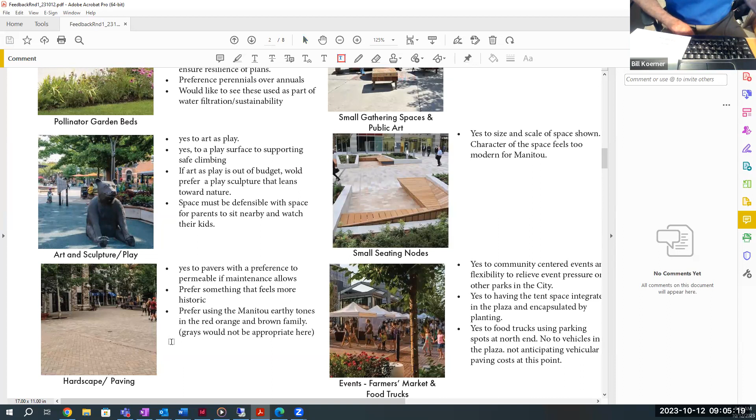Just a piece of information — you might look at the Winter Blend mix they have at Home Depot, a mix of colors that comes out really nice. I used it for my backyard. Winter blend, yeah, I think that's what they call it.

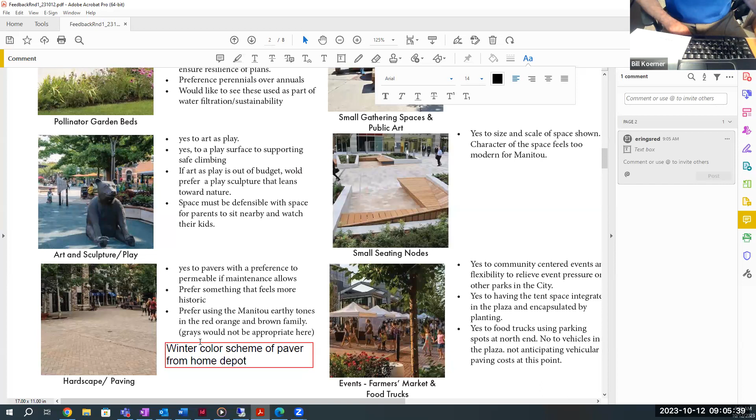I think any of those would be appropriate. Aaron, is there any possibility — that's not the right word — opportunity or appropriateness to use decking instead?

I think it's something that could be explored. I'd say it could come at an additional cost, both in installation and life cycle cost, just in terms of staining and upkeep. If we went with a hardwood, it's more expensive to install and hasn't been as resilient to the elements in my experience.

I was thinking the opposite, that it might be less expensive, but I don't really know. I like the paving better — I was just looking at costs and permeability.

It's something we can ask them to explore as we're looking at materials. In my experience, it's not necessarily a lower cost per square footage for something comparable in maintenance level and long-term life cycle cost. I'll write that note down though.

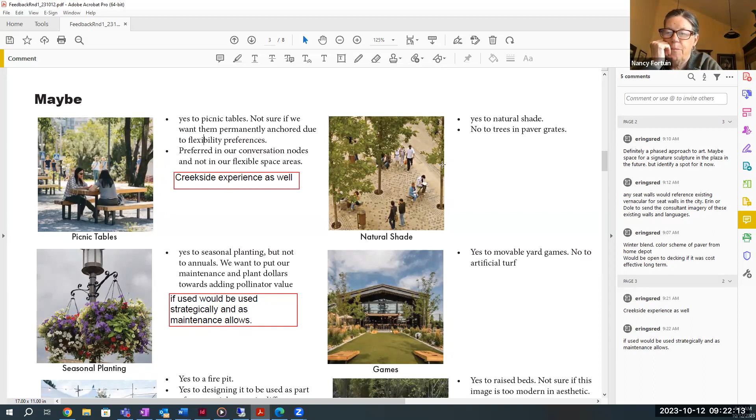Awesome, any other comments or thoughts on these ones?

Okay, so fire pit, and this isn't one that's been identified for discussion in terms of different comments. I need to adjust, I didn't adjust this text specifically after I'd gotten some of the comments, so I apologize. So maybe to a fire pit.

I think what we heard at the community meeting was the potential for fire to be part of some of the different cultures and religions, in terms of their ceremonies. So thinking of this as an event space that's welcoming and inclusive, having an option where fire could be used safely for their different ceremonies could be helpful in terms of being inclusive to the different communities reflected in Manitou's residents. If it was a gas fire, it would have to have controlled use.

It would be turned on for events or turned off, and that would be in a secure location where it would be turned on and off. If there is a fireplace there full time, it would be something sculptural, so it would still be visually appealing when it was off.

Another thought I had after last night, thinking about this some more, was with some of these conversation nodes we're setting up, you could always set them up where a fire pit could be located in them if there was a group renting out the space and needed it for a ceremony, but it might not be a permanent thing there. But that's why the conversation is happening around the fire pit, from that community input as it related to some of the different spiritual ceremonies that might require a designated space for that.

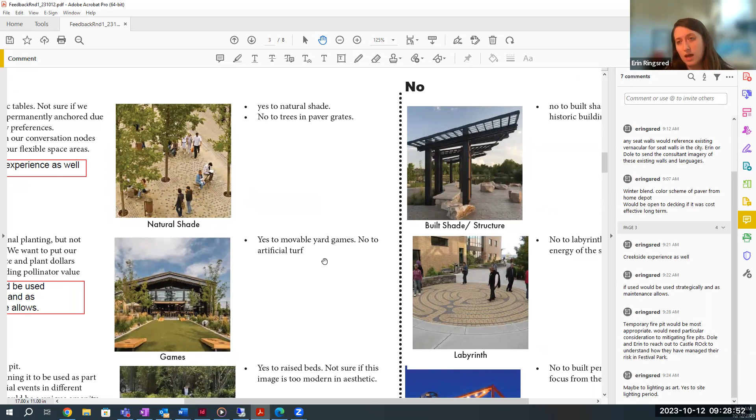Yes to movable yard games, but no to artificial turf, unless people are really liking artificial turf—it has maintenance concerns of its own.

If it's being used as a functional play space like it is on the graphic, I think people would be a lot more receptive to it. If it's being used like we're trying to have fake grass and it looks fake, that's different, but if it's utilized as a community game engagement space, I think that could be usable, because there's nowhere to do something like this anywhere else in town that I'm aware of.

To me, there should be no turf in this area anyway—it should be across the street from Memorial Park where you've got a lot of turf. Well, Nancy, the point I'm making is if it's being used as a game space, as an amenity space and not as a park, it could be well received.

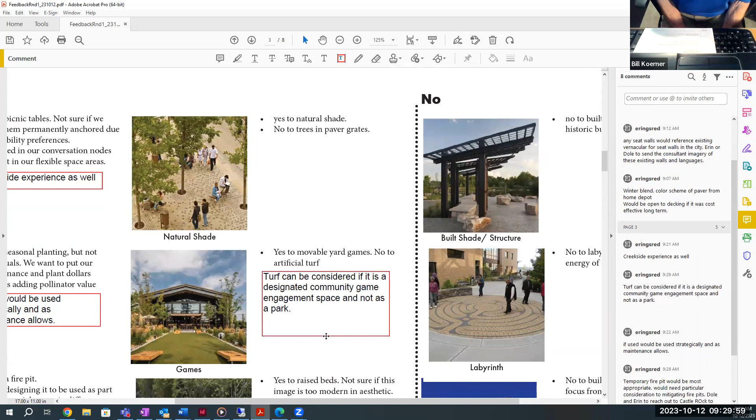Yeah, and I think there are games that could use this space with the artificial turf. That's something we ought to investigate a little bit more, and it gives you year-round ability to do that. Yeah, exactly.

In terms of a space like this, I guess this is where maybe I was thinking turf might not be something we were as invested in for some of these spaces or zones. If we have lawn games occurring where the event tents are going to be, or where you'd have cocktail hour from the building, that would maybe be more appropriate as hardscape. But if there's room in the plan for a designated games area, then I think artificial turf would be appropriate there.

The next image here, unless there are more comments on that one. Okay, the next two images here are raised planter beds and site lighting.

Yes to raised beds where appropriate. The image aesthetic is maybe a little more modern than we're looking for, but we like the intent of how raised planter beds can help create and define a space.

Yes to catenary lighting opportunities, but we'd prefer to meet our safety lighting requirements with dark sky friendly lights, and use catenary lighting at events or community events so we can be sensitive to migration patterns and dark sky friendly requirements. I think we'll make a note that those could be on their own switch from inside the building, and they'd be event specific and available.

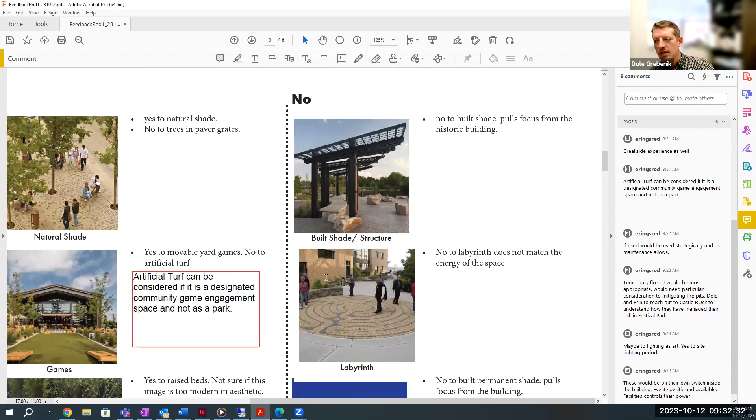And I think that would also apply to the fire pit. I do think it would have to be managed some way.

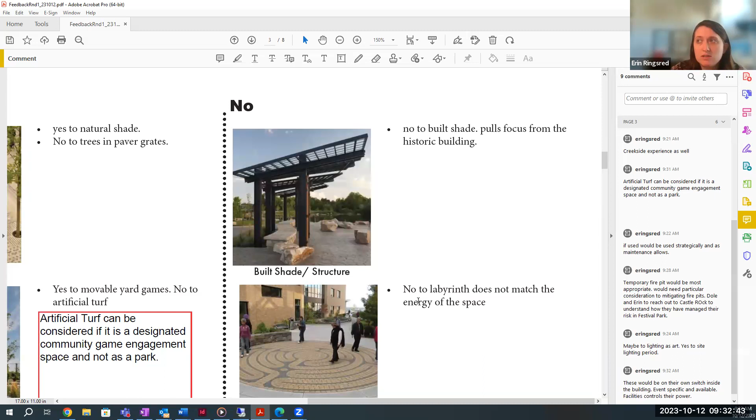And then here are my no's. There are fewer, I think, flat out no's in some of these images. No to built shade that would pull focus from the historic structure. No to labyrinth, it does not match.

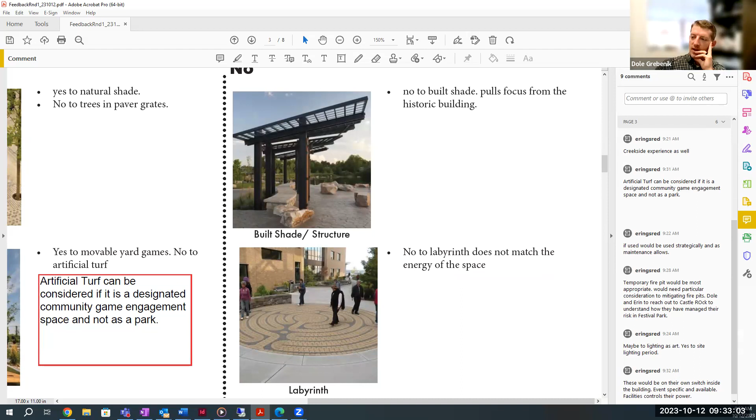So the built shade, I don't know if we say that's a no. We have such a large space and we're going to have such small trees, it's going to be a long time before those trees offer shade. Right, so this is a no to this specific type of shade structure.

I do have another image in another section where I've incorporated some of Tweed's images from the Santa Fe Plaza, newer imagery that I think reflects more of the intent as something that could be taken up and taken down once the trees meet their maturity, and again respects the view shed of the historic structure.

Okay, but I could move this whole thing into a maybe. I guess I didn't realize we were talking specifically about this Japanese inspired one. Yeah, for this one. I'll clarify this here.

And just to comment on the historic aspects of the building, originally we had talked about putting in a shade structure that matched the original pavilion. There are small pavilions, like picnic pavilions, out in front there. I can't wait to see Tweed's pictures. Also, when I see this sort of shade structure, all I can think of is putting solar cells on top to provide electricity.

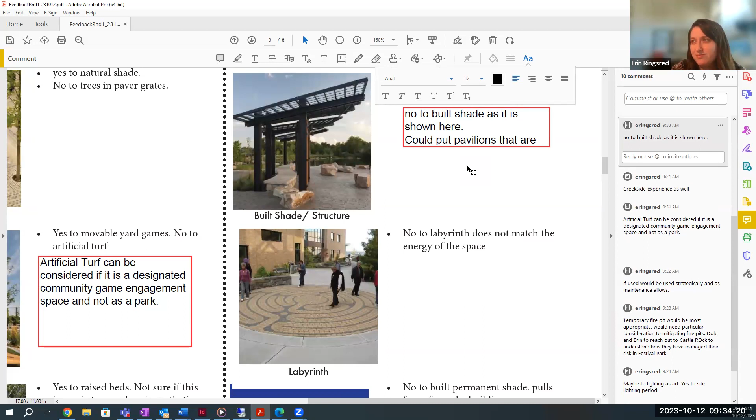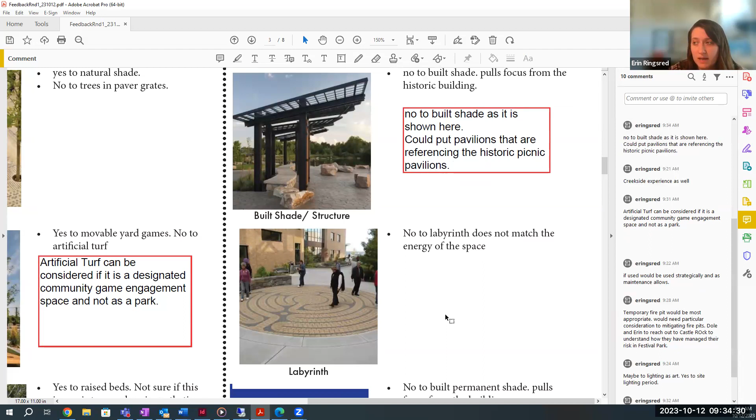No to labyrinths, as they do not match the energy of the space. And then this one, I will adjust the language on this structure because I think this is a very industrial interpretation of an overhead structure, without providing additional shade.

And Nancy, were you the one that said it at our meeting? I guess we'll just wait till you get to your other drawings, your other pictures. Okay.

Then I talked about programming, because one of the things, at least for me, in terms of how the images were describing it, was that some of the different zones didn't seem mutually exclusive in terms of functionality. So I took some of the site images we were affirming of and classified them with some of these programming categories, where we see that overlap.

So multi-purpose open space, in this area we could have tents for events like farmers markets, or a community potluck outside, fitness classes, small musical performances, and then built shade like a shade sail, like what you're seeing in this image, which as the trees mature would maybe be less necessary, or can be taken up or down as feels appropriate.

Flexible, movable seating, building connections, and sort of the reservable space. So if we have these open spaces, most of the time it would be open to all, but having the option—we heard this from City Council as well as the recent public meeting—is that if you have spill out space, having that be sectioned off.

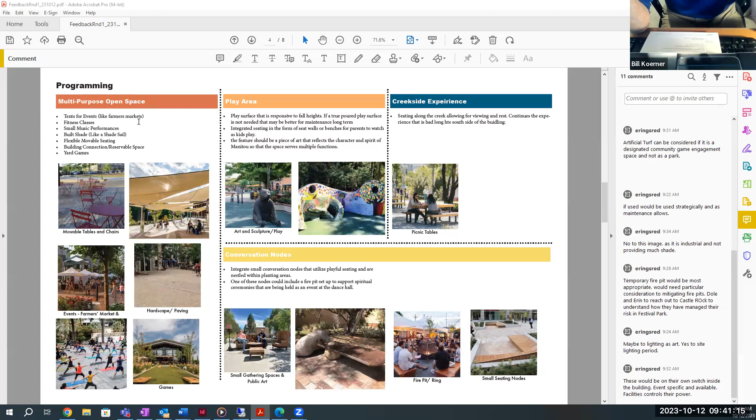In terms of mobility, a couple of things. One is wayfinding signage, I don't know if it would go into the plaza or someplace else, but it seems like near the multi-mobility hub would be important. And also, mobility isn't just bikes, it's walkers too.

So I'm thinking a water station potentially. I suppose you could go into the restroom, but a water station is just a possibility. I feel very strongly that wayfinding signage needs to be incorporated into it.

The water station is important, because a lot of bicyclists will come up to the water station, fill up and take off. So I think we need an outdoor capability for water.

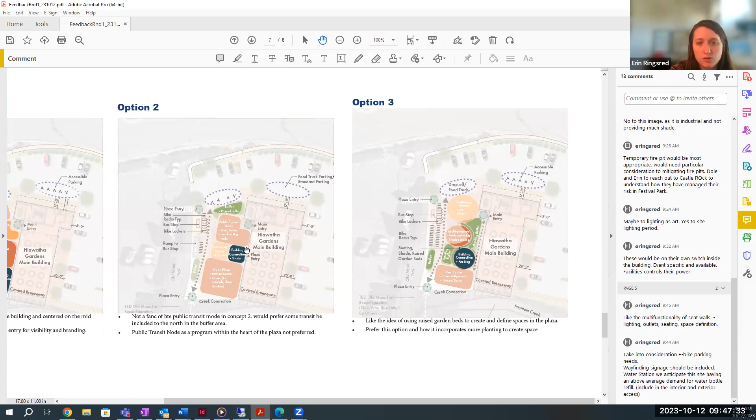Can you make it a little bigger, Erin? Yep.

Sorry about that. Thanks. So this node here was something that I heard in comments was not preferred, because it pulls more of that transit node into, or defining it as a public transit node, into the plaza, and wanting to keep the plaza more community and gathering focused than sort of pass-through focused with its programming.

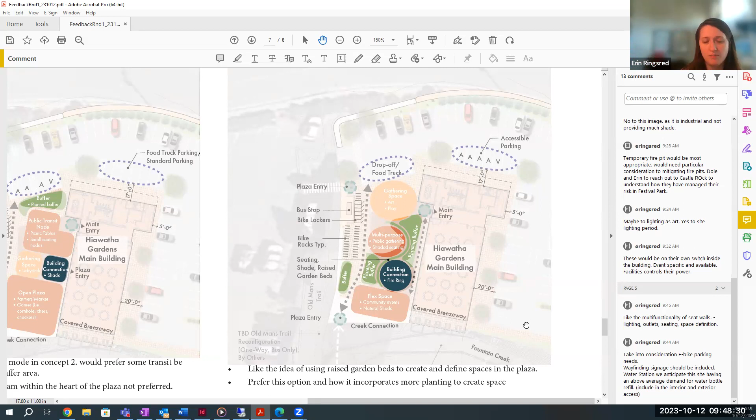And then the last option, we liked the idea of using the raised garden beds to create and define spaces within the plaza. The exact configuration shown here maybe is not preferred. We liked how this option incorporates planting to create spaces, and it feels like a greener option. I've highlighted the building connection, but I know the fire ring underneath it, we're on the fence about that.

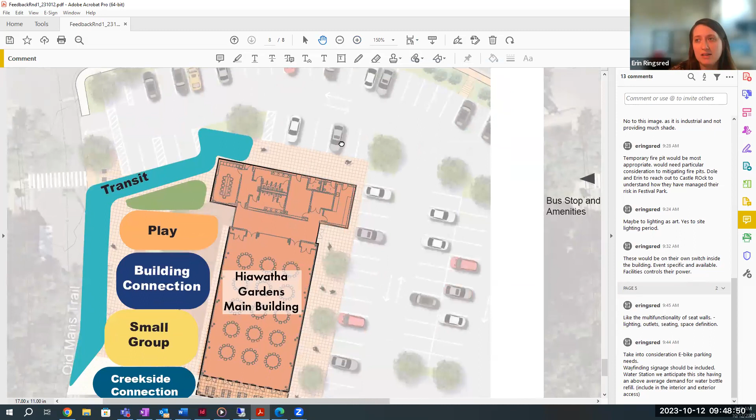One thing I did to kind of capture those comments was, Bill, I was having some of the same thoughts of how much space do we have, and what does some of this programming need in terms of space. So I first sort of simplified it into these zones.

It's sort of how we're stacking them moving north to south, so you have some of these smaller group connections here along the creek, a little more of those contemplative spaces. And as you move north, a bit more in terms of energy of the space, or how large of a gathering it would be, or the kids in terms of play.

And then keeping a lot of that transit along the periphery, as it reflects the circulation paths of people that might be coming through transit. If they're coming through here, they're coming through here - this might be more of a minor connection. They're coming across the street and along the sidewalks as well.

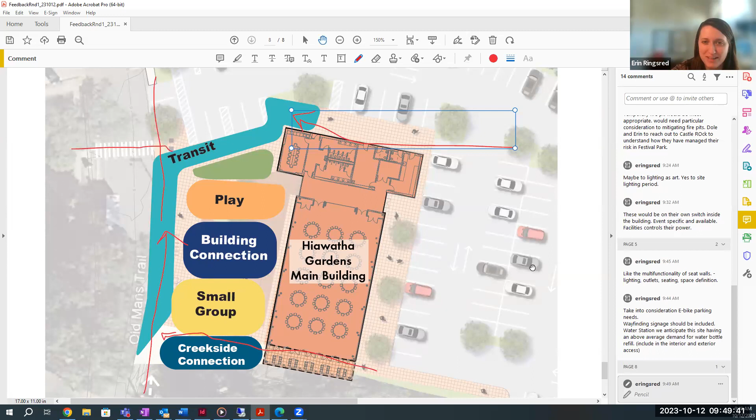So that's it, and if you guys hate it, that's fine. I just had, I draw, and that helps me think things through, so I took what we liked about those other options and incorporated them here.

So keeping the open plaza space centered on the building, allocating some open space along the building edge. We already have to have a 5-foot setback for fire mitigation in terms of any planting, so making that a little bit wider so that it could maybe be fenced off for cocktail tables for an event, temporarily.

Having these conversation nodes here at the bottom, and that artful play node here. I did scale these nodes based on other examples or precedents of these spaces.

So a conversation node would typically be about a 15-foot radius around - I found that example they shared in that image on Google Earth and measured it, and it's about 15 feet. Fire pits are usually about a 25-foot radius, just because of the size of the gathering in a community-type fire pit. And then I measured some of those play spaces if we had maybe 1 to 2 structures and their associated fall zone buffers.

The bus stop and amenities - I think one thing we have the opportunity to do with this project is make that bus stop itself meet all these accessibility standards in terms of boarding through the front door or the back door, that we have the associated clearance, and using the bike lockers, since they're already sort of an impermeable element, as part of that buffer to the north.

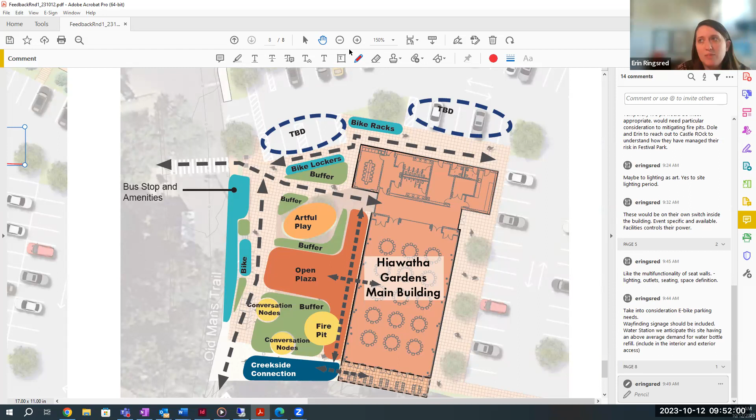I have these areas here as TBD, because I think that's one of our items for discussion. The fire pit is an item for discussion as well. I think this could easily be converted into a conversation node if a fire pit was nixed in terms of feasibility. But those are just some of my thoughts.

So trying to sort of filter what we've heard. Is there any comments on what some of these conclusions were, or if this page is worth sharing with the consultant team or not? It's just me thinking through and processing the comments we'd heard.

Erin, I really like how your drawing has the functional elements of the space identified. There's a functional connection from the side entryway to the bus stop, and there's also spaces along the building. I like the fact that there are defined spaces.

I just felt like some of the consultants' layouts didn't let the space function as well. It was kind of cluttered, or it didn't make as much sense. It was like they threw some things on a drawing, which is okay, you've got to start somewhere. But I look at yours and think, we keep talking about these seat walls, and if that upper green—

buffer, if this one here—I think that's drawing on your screen. Yep, I see it. If that was a nice Manitou style seat wall, right? And—

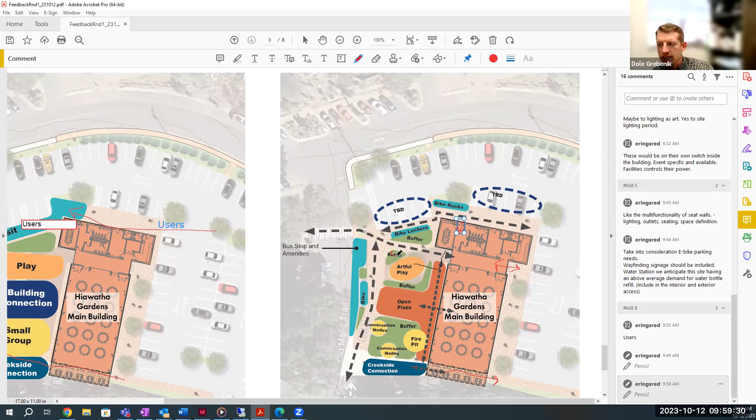Okay, well Nancy, I think that's good for us to be sensitive to. I think, Erin, what if we changed - you have buffer - what if we went ahead and labeled some of those planted beds, vegetated something, and communicated what some of those potentially could be.

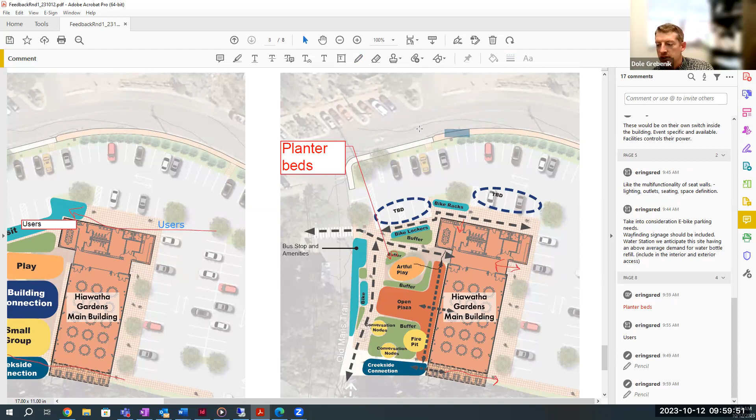And Nancy, one of the things we got from that night was that it was a very pollinator friendly group. There was less functional multimodal perspective. So, right, there were no artists there, no multimodal there. Well, there were, because Carl and Joan were there, but it was very heavy on gardening. Yes. So I think we do that, Erin - we label some potential planter bed locations.

I think it would be fair to go ahead and identify some potential opportunities for art. Like you have that bike locker right next to the parking lot, next to that green buffer - maybe there's a good opportunity for some art right there. We go ahead and identify some of those things, so when people see these drawings, we've kind of held their hand of what we're thinking.

And I will say, our client team or consultant team is going to take this and make it better, and resolve it into more form-giving elements. Then if needed, once they finish that we can add more of those call-outs that Nancy's talking about in terms of what we heard - the increased planting or impervious surface being added in this option versus the previous option. I think that's definitely something we can do as we curate the content for public engagement.

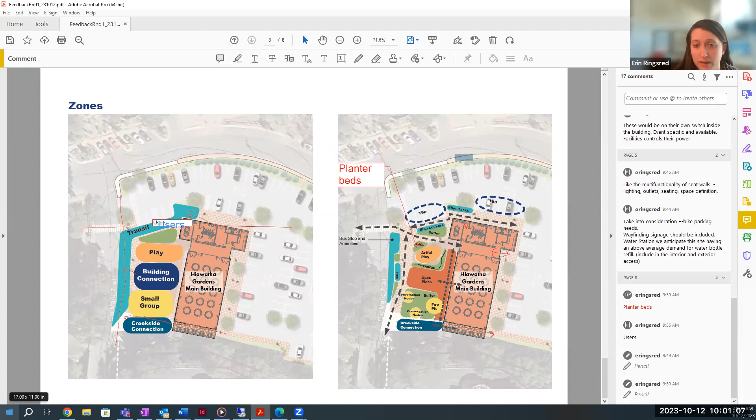And then I'm going to go back to these. There were a couple topics we didn't cover that I think we've got a few different comments on, or different perspectives from the meeting. I think we've talked about the fire pit, so we don't need to talk about that more unless y'all want to. Food trucks is the other item - where they would be located as it relates to the accessible parking locations.

Based on Tweed and Susan's comments about where that's located, and wanting to make sure people needing ADA accessibility have easy access to the plaza, I think makes so much sense. Perhaps the directive to the consultant team is maybe there's ADA parking spaces that need to be in both of those locations, set up so that if in an event they want 2 food trucks on the north side, we can allocate more spaces elsewhere for accessible parking if it needs to be there in terms of visibility and clear access.

I think that was one of my concerns - just if you're a business parked over here, but everybody you're trying to serve is over here, they might not know that you're there at that event. So if it was set up for an event with food trucks, perhaps more of these areas then become accessible parking. But on a regular Tuesday when there's not food trucks present, having these as ADA parking spots makes a lot of sense.